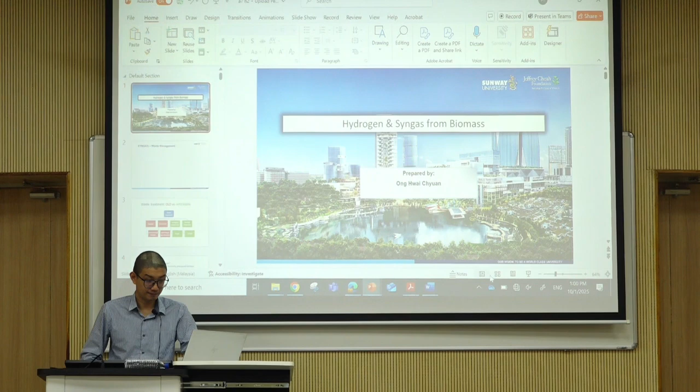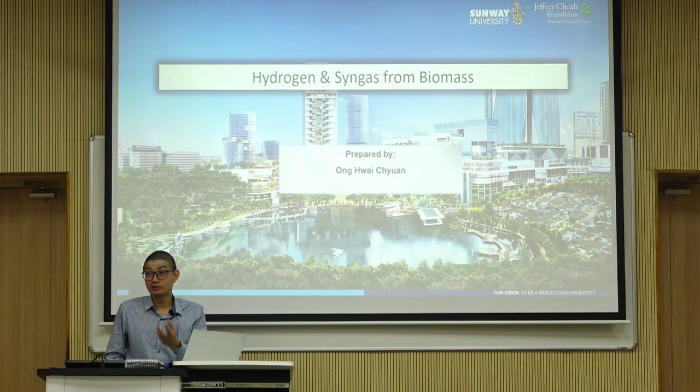Yeah, the last one is about the hydrogen and also the syngas. Because for the past few days we keep discussing about the liquid fuel, solid fuel, liquid product and solid product.

So today we would like to discuss about the gas product, starting with syngas first. How are we going to implement or utilize our waste management in order to get the syngas? So waste management, waste treatment, we have many methods. We have the very typical method where we dispose directly for the landfill. Of course, we have the environmental impact, a very serious environmental disaster.

So currently in many countries we also have the incineration plant, which burns it directly, but it will produce greenhouse gas. But now the incineration plant is already improved. They can recover some heat to generate electricity, but still burning, so the greenhouse gas will be produced.

But the most renewable way, the latest way, is more on the biological treatment or the thermal treatment, which we've been discussing these few days. So the biological treatment normally gives us biogas. Then the thermal treatment gives us syngas, and both this biogas and syngas contain hydrogen gas. So this hydrogen gas is currently the focus.

We are focusing now because hydrogen, why is it focusing on hydrogen gas? It's one of the future fuels. Why is hydrogen a future fuel?

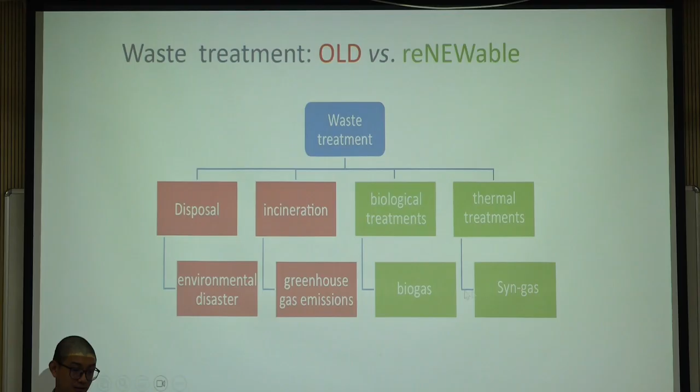No emissions during the combustion, and also high energy, high energy value per unit. So the current focus shifts to hydrogen energy. But before we go to hydrogen energy, we look at syngas first.

Syngas, what is syngas? It's a synthetic gas that goes through the thermal chemical process from the biomass. So the main product will be CO and also hydrogen. Sometimes it will produce some methane also, and also CO2.

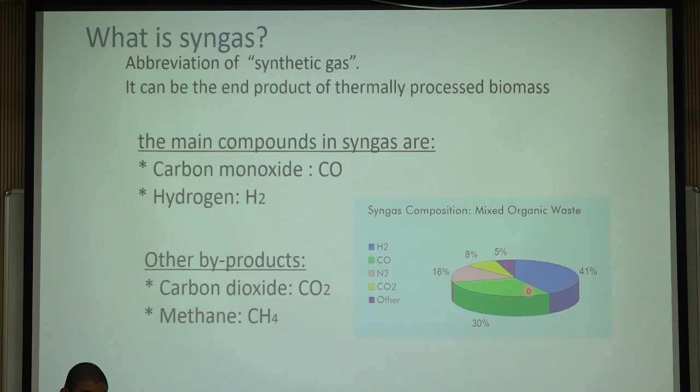So normally this is from the organic waste, which is biomass. Most of the biomass produces 40% hydrogen, maybe 30% CO, and some percentage of methane gas, and also other types of gas. So this is the syngas.

So the pathway for the syngas. After you produce the syngas, what can you do with it? Normally the syngas will be produced through the gasification process, thermal chemical conversion, but mainly due to the gasification process. When I talk about the thermal chemical process, the pyrolysis process will produce syngas as well.

But as I discussed yesterday or the day before, the pyrolysis process's main product is what? The bio oil or the solid product. But no doubt syngas will be produced as well. But for the gasification process, their main purpose or main aim is to produce what? The syngas. Then what can you do after you get the syngas?

So first, the syngas can be converted into methanol, and also the syngas can go through generators and also the boiler directly to produce steam and power to generate electricity. Then this can go through the genset, the internal combustion engine, or can go through your fuel cell.

Then syngas is the hydrogen. This hydrogen has more applications. You can use it in the fuel cell, and also transportation. We have the hydrogen vehicle, then it can go through the refinery as well, and also the hydrogen power plant to generate electricity as well.

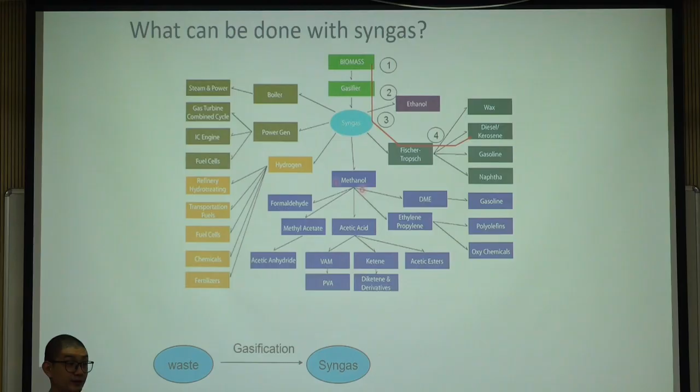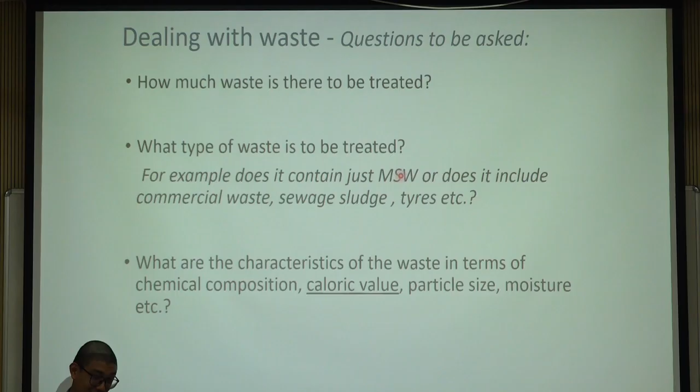So what is the calorific value or the energy content for the waste? What's the particle size and moisture, etc.? The waste that can be treated is many things: municipal waste, commercial waste, sewage waste, agricultural waste, tire waste, and so on. So how much is to be treated and how we can get this sustainable feedstock or raw material, we need to consider that before we continue.

When we talk about thermochemical treatment, there are two types of biomass: biological and non-biological materials. Some non-biological materials have relatively high energy content. You know why? Plastic waste. Generally, plastic waste has very high heat content or energy content. That's why currently many people try to convert those plastic wastes into syngas or hydrogen gas.

For biological waste, it's just like our agricultural waste, our food waste, and so on and so forth, with the average heat value maybe half of the total non-biological. So let's see which one you want to convert.

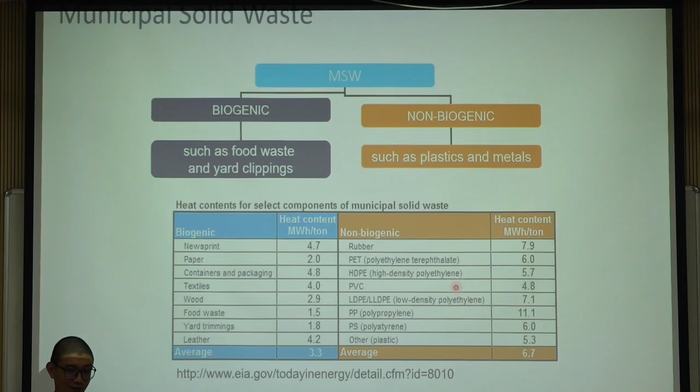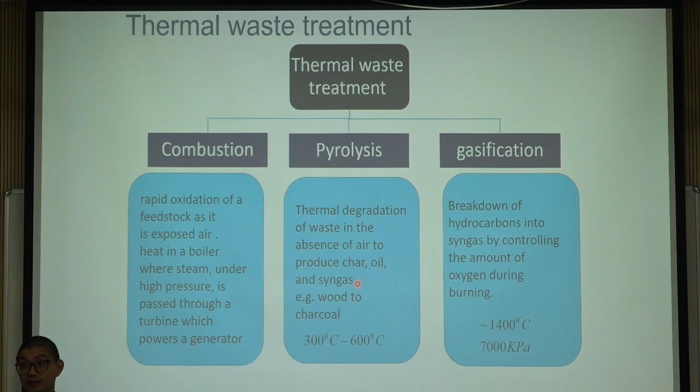So their main product is what? Char and oil, and of course syngas is produced as well. Then combustion: we throw it directly into the boiler or whatever to generate heat and electricity directly. So that is the fuel pathway. But in order for us to get the syngas, gasification is the preferred technology.

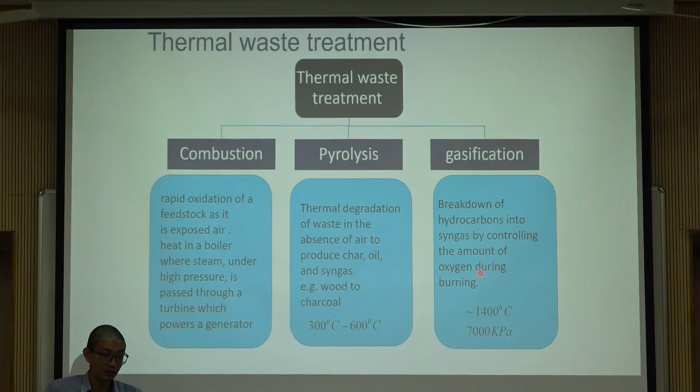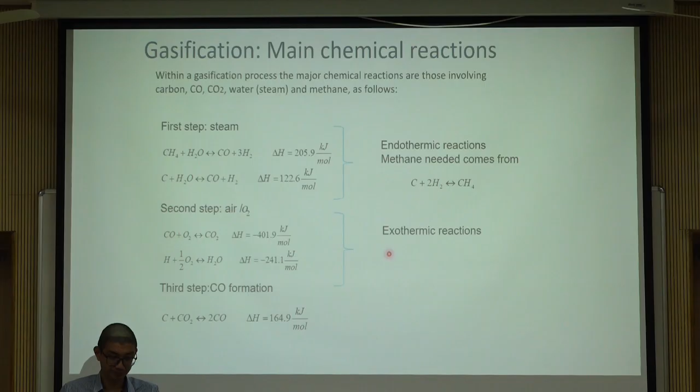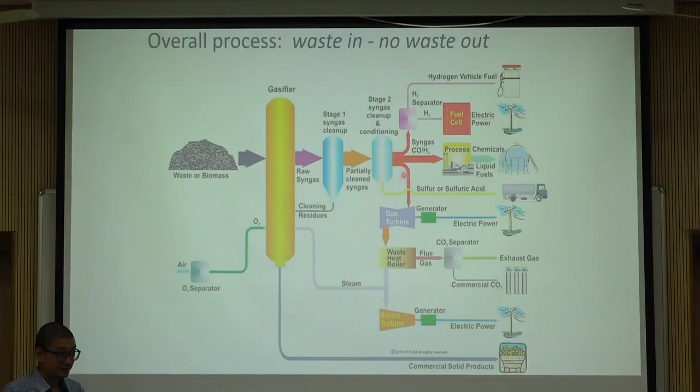So this is one very typical gasification process, where the main aim might be to produce hydrogen, but other byproducts can be used for different applications. That is about syngas. So what we want to focus on is the hydrogen gas, correct? Why hydrogen gas? This is something I also obtained from one study from India. As I told you before, hydrogen energy or fuel cell energy was already discovered in the 1800s.

Then during that time, they wanted to use the fuel cell, they wanted to use hydrogen, but why not? Because sooner or later we discovered oil and gas, which were much more efficient and could be obtained with hardly any cost, because during that time hydrogen and the fuel cell were just one of the energy sources. So until today, we are still not using it.

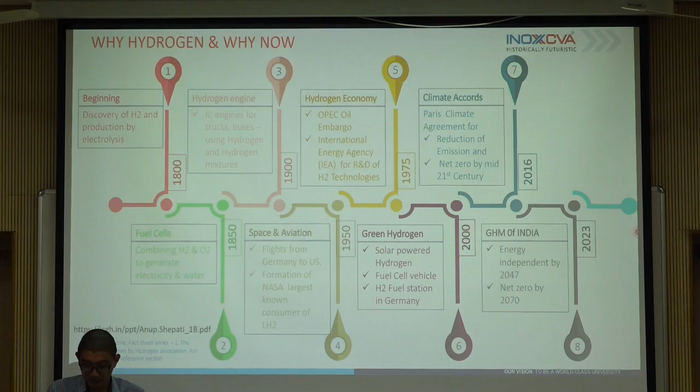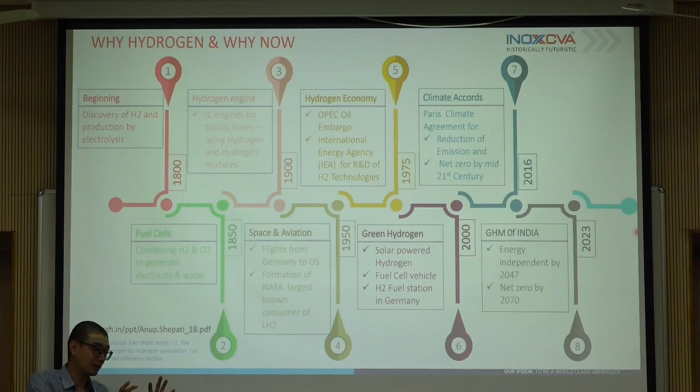You see, some countries or regions are rich in solar, but they are unable to store their solar, right? Currently they just store it in batteries, but the capacity for battery storage is limited. But no doubt this is a very good storage medium. Then in Australia, how do they store it? In Australia, they have very big land with solar energy. They store their energy in terms of fuel instead of batteries, because batteries are very heavy and hard to transport.

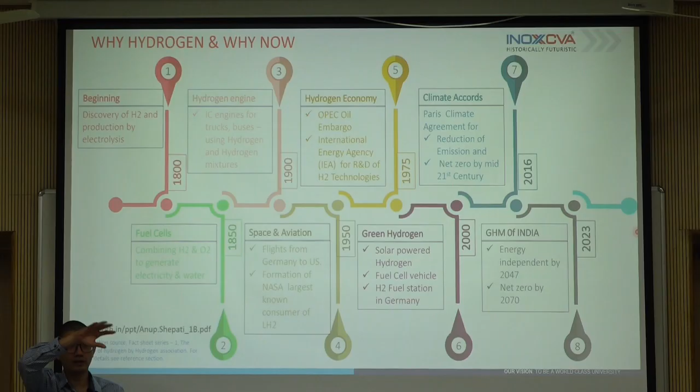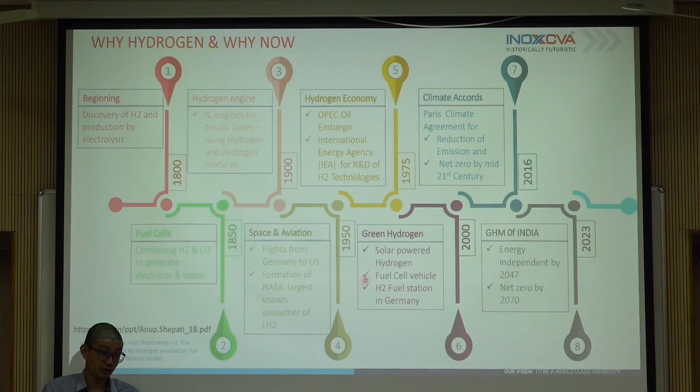So they convert the surplus solar energy through electrolysis to produce hydrogen and store the solar energy in terms of fuel. So this is one way of storing energy. That's why we have solar-powered hydrogen.

So the growth trend: currently, as all of you already know, it's mainly focused on European countries or the IEA. They are focusing more on hydrogen energy, including Japan, Germany, and the US. These three countries are the top consumers of hydrogen energy compared to others. Hydrogen currently plays a very important role in the energy transition, because now we are in the energy transition, with Industry 4.0 taking place. So what sustainable green energy can replace fossil fuel to reduce emissions? Hydrogen energy might be one of them.

So this one is to give you a brief idea of how much hydrogen can be produced from different types of waste or raw materials. For example, municipal solid waste can produce around 80 kg of hydrogen. 1 ton of biomass can produce 50 to 100 kg. You see the capacity is less than 10%. Currently, plastic is the highest.

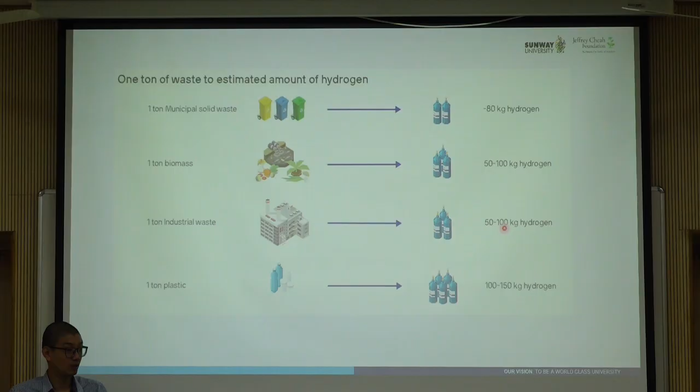So yeah, this is the technology to produce the hydrogen. This one is not all green technology. I just show you all the potential technology that can produce the hydrogen. Currently, our hydrogen production mainly depends on what? Natural gas. Still from the natural gas, which is basically from the methane. Methane goes through what? Goes through the steam reforming, steam methane reforming process to get the syngas and to get the hydrogen. Because this is currently the most sustainable method.

So what they do on that, because this is not green, right, it's from the fossil fuel, but currently I can say at least more than 70% of our hydrogen is from this process. Currently what they do, because what happened? What happened to the steam methane reforming? Anyone know? Steam reforming from the methane. It probably depends on natural gas resources. This is one thing, but we have abundance of natural gas. You don't worry. Because more and more oil and gas plants recover.

So yes, 20 years back, people kept saying the oil and gas will be decreasing and reducing, but not nowadays, because no one is saying this anymore, because there are more and more oil and gas plants discovered. But we are shifting to the green energy due to what? The emission factors, emissions. Because why? Because the steam reforming process will produce CO2. That cannot be avoided. But this is a very effective process to convert the natural gas, which is the methane, into the hydrogen. No doubt.

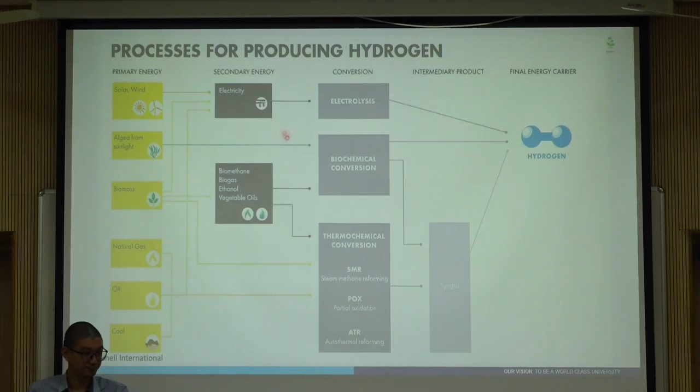So you see, in order for us to produce the green hydrogen, we must have the overall ecosystem. First, we must have a totally green production process. Right? Start from a green production process to produce the hydrogen. Not only look at the end user and the power generation only, because we know that when we use the hydrogen to turn into energy, definitely it is very clean. It's very clean. But the thing is, how can we have sustainable green hydrogen production? After it's produced, storage is another issue.

Transportation is another issue as well. This is all the barrier that we need to break through, and also we need to develop this whole ecosystem so that we can have sustainable green hydrogen.

And after that, I go to the end user. Yes, end user, no problem. I mentioned during consumption, very green. And after that, from this we can generate the green electricity or power, so that we can have totally green hydrogen for the overall life cycle or ecosystem. If not, you are green in the end user or the consumption part only. How are you going to produce the green energy?

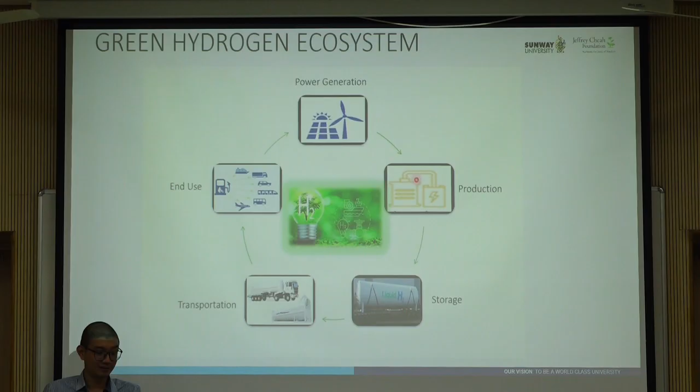Yeah, that's the thing. So the first challenge is coming. Storage. Because the production technology, just now I briefly showed you, a lot. Correct or not? And the main challenge comes: storage. The storage in gigajoules of each fuel, you see. For hydrogen, this one is liquid hydrogen, compressed hydrogen with different pressures, compressed at 700 bar and 350 bar. You see, the storage is very small compared to petrol or diesel. So storage, that's the thing.

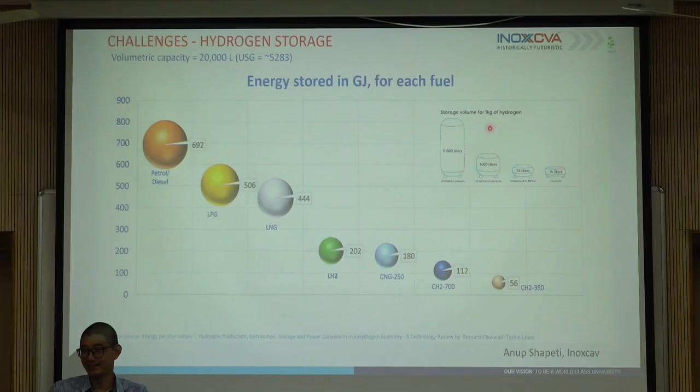Storage of 1 kg of hydrogen, you see. I need 11,000 liters. If not, you need to compress it. If not, you need to store it as a liquid at negative 200-something degrees. Why negative 200-something degrees? Hydrogen is in what form at atmospheric or ambient temperature? In gas form, right? So that's why. The volume for gas is very big compared to liquid and solid. So that's why we need to know this one.

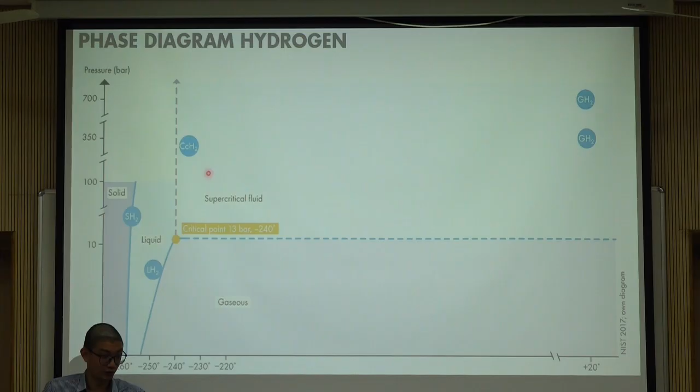Move back to the fundamentals. So this is the phase diagram for hydrogen. You see here, it is in the gas form up to 13 bar. If we want to maintain it in liquid form at atmospheric pressure, we need negative 240 and below. If not, we need to compress it. For the gas form, very high pressure. So that's why storage is one of the issues.

So, compressed and liquid. These two are the typical methods. One is the compressed gas. Another one is the liquid, at negative 250-something, which is about 80 degrees lower than liquefied natural gas. That's why it needs very low temperature, and compression up to 350 to 700 bar. That's why it's very high compression.

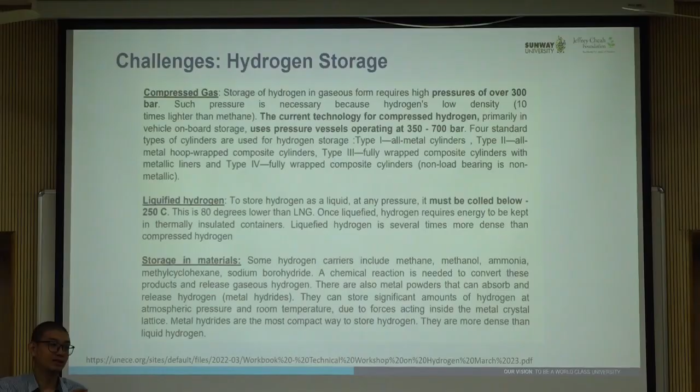So now there are many studies starting to find suitable storage materials for hydrogen, I think I mentioned it a few times in the last few days. Many studies found certain materials that can store hydrogen well, but how are they going to extract it? Store and extract, that's the thing. Another way to store it is to convert hydrogen to another form. That's why people tend to convert it into methanol, and when you want to use it, we convert it back during consumption.

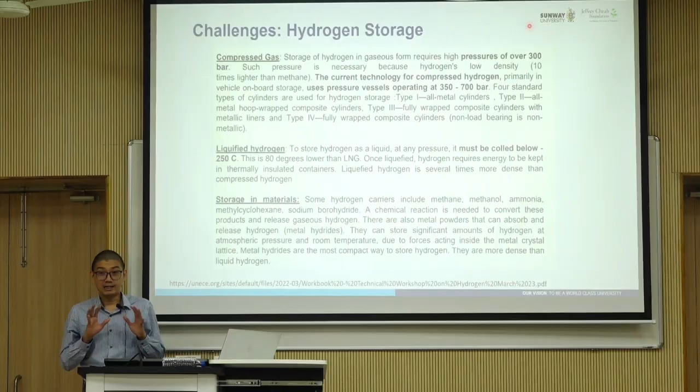So that's why you see the fuel cell unit. Normally we use hydrogen because H2 plus oxygen gives H2O, and the energy is generated, right? But now we have the methanol fuel cell, because methanol is easy to carry and easy to store. So we can use methanol directly in the fuel cell during consumption. But if you use methanol, CO and CO2 will be produced. Correct. So these are the challenges, the first challenges.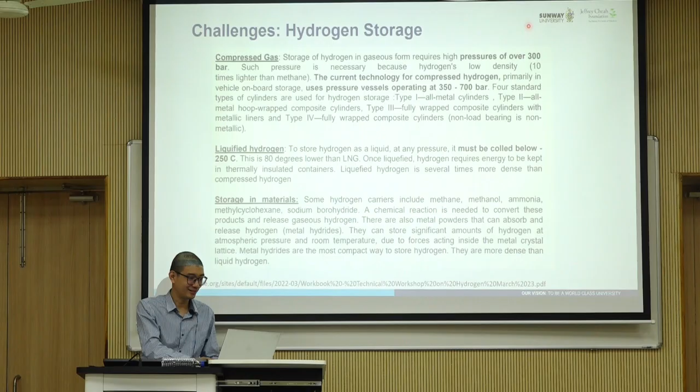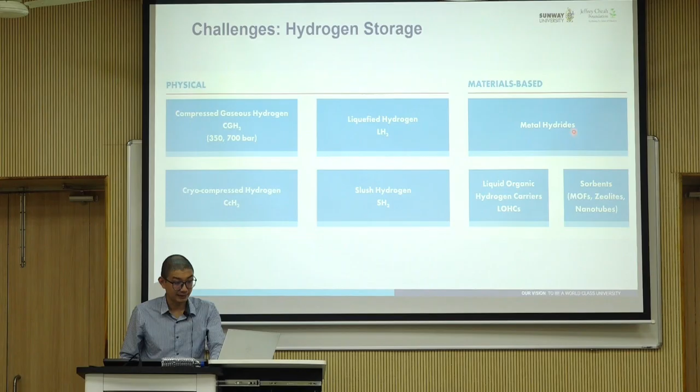And storage, no doubt, is also an issue: storing hydrogen at very high pressure. So we need to find suitable materials that can store hydrogen. So this is the transportation, which I just mentioned.

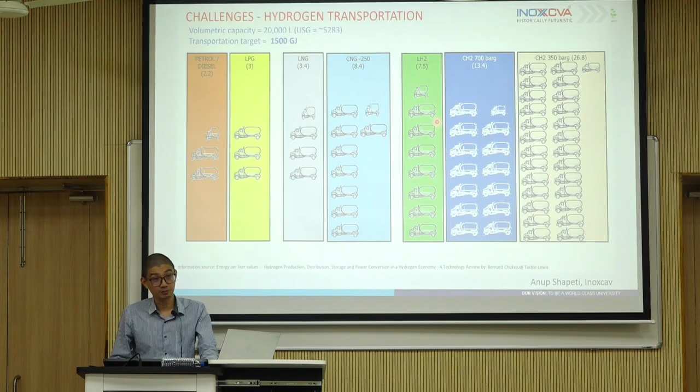You see, in order to transport 1500 gigajoules of petrol and LPG, you need only 2.2 trucks, and this one is 3. But for hydrogen, how many do you need? Even compressed to 700 bar, 13.4. This one compressed to 350, double. And this one is liquid form. That's the thing. So storage and transportation are the main issues facing hydrogen energy.